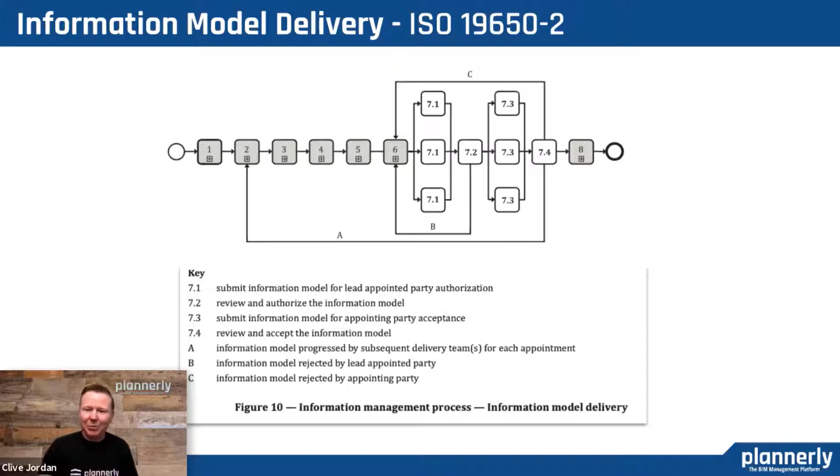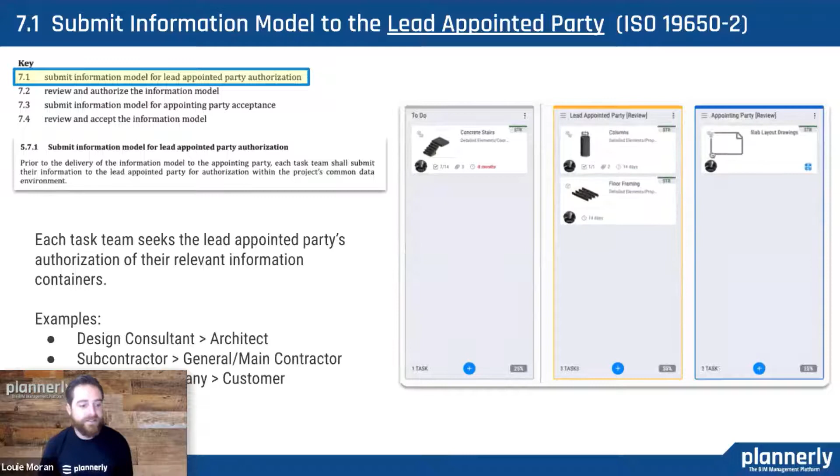In very simple terms, we're looking at submitting the information to the lead appointed party. And that could be a number of different ways. Design consultants to an architect, subcontractors to a main contractor, an outsourced company to a customer. This could be any one of those as examples.

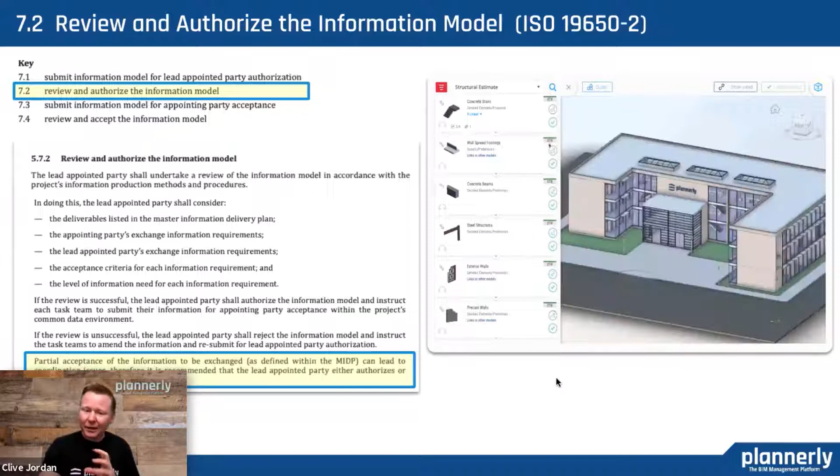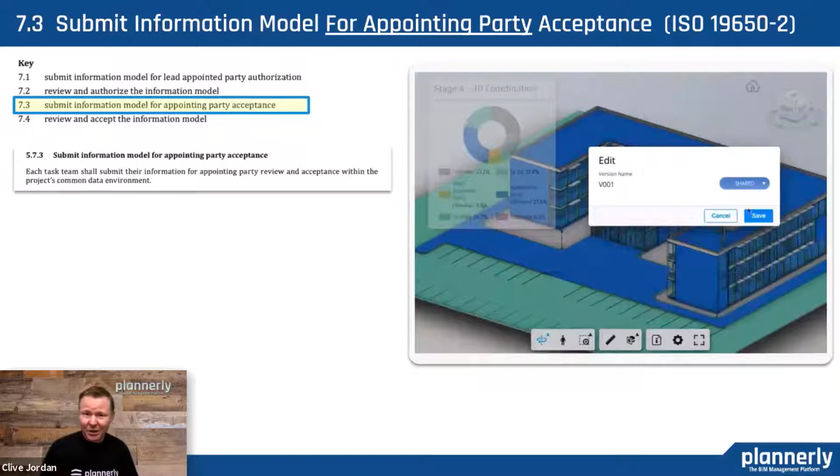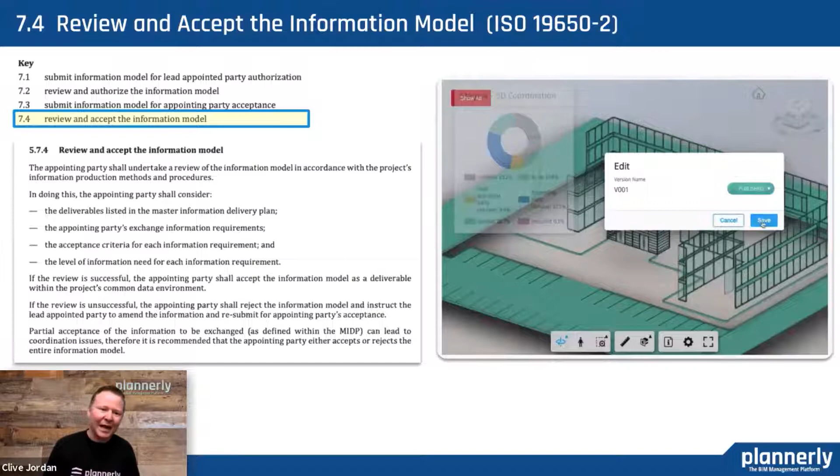And then once approved, if not all rejected, once approved, that would then be submitted to the appointing party for acceptance. And again, once they have gone through all of those really important steps of verifying that it meets the listed deliverables in the master information delivery plan, and does it meet the level of information need, all of the exchange information requirements, etc., then we have some deliverables that can be authorized for use.

So if we break that down, there's a few steps there, and it's not overly detailed. We've got a lot of documentation to read in the standards, which is fantastic, but when we look at this part, it's not in massive detail. In the previous stage where we were producing information, the task team has their review before submitting. As they submit to the lead appointed party, they are accepting or rejecting, and then the appointing party is accepting or rejecting.

This whole workflow is pretty simple when you look at it, but today we're going to unpack a few best practices to dig in deeper into each of these aspects and hopefully provide some ideas that can improve your delivery workflow. We'll look at understanding requirements, how we define the submittal and checking workflows, how to keep good records, and then how to use structured data in other tools as well, not just in the Plannerly workflow.

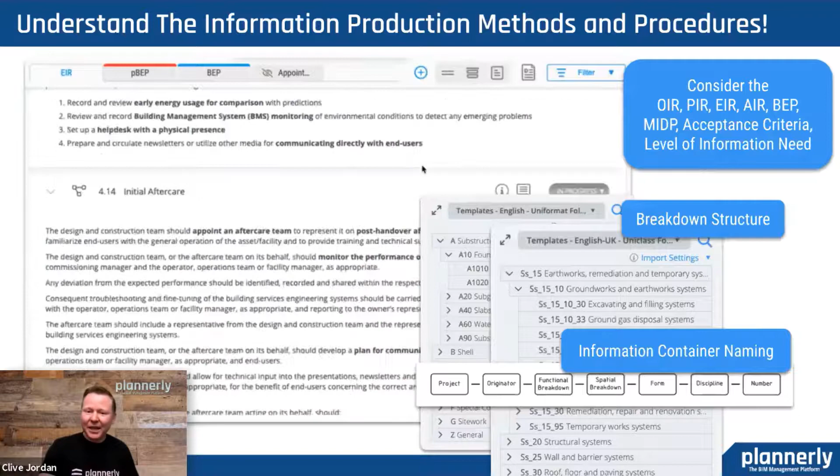So the first one is understanding requirements. We need to read the information production methods and procedures contained throughout that plethora of three-letter acronyms, all of those documents. How am I exchanging? And when we get to level of information need, what am I exchanging? And then when I exchange it, how do I name that container, that set of information? How is it classified? Just understand the standards, basically.

Yep, and then your scope, purpose. When it comes to ISO 19650, everything is driven by why you're doing it. We always start with the why. We push that in almost every webinar. Start with the why when it comes to any scopes. We've mentioned these in previous episodes, but having the why is going to have you package these in the right manner.

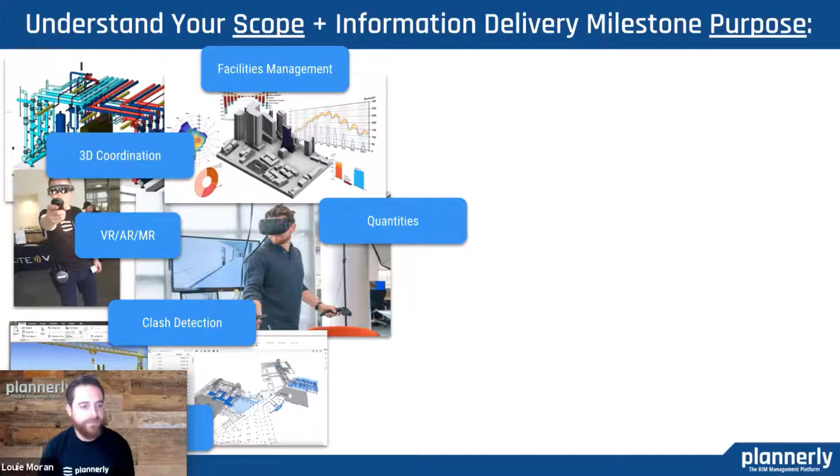So for facilities, quantities, AR, VR, clash detection, these are the delivery milestones that you'll be sharing and delivering to the next team. And when you package it, visually understanding it in a structured way is really important, as we'll show downstream in use of that information in other tools as well.

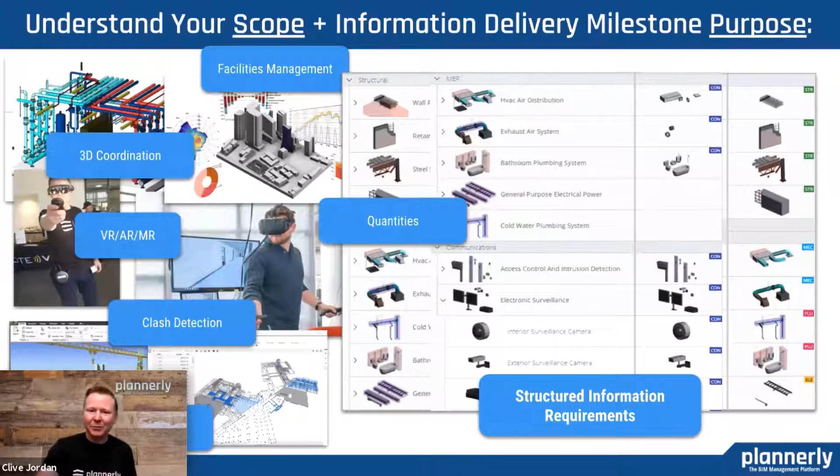Management tasks, it's not just about understanding from a BIM perspective, from a modeling perspective, but also information. Here we have a set of tasks related to, in this example, the assessment of need. But in this phase of the delivery, you'll actually have a set of tasks which are checklist-based items that are part of the information management tasks, also part of the templates inside of Plannerly to be able to check off.

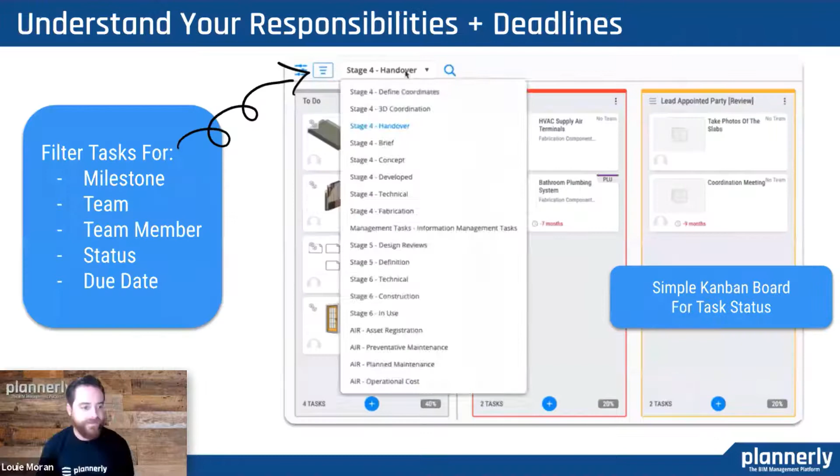We need to understand what is our responsibility. We typically have documents that summarize all the responsibilities of different teams, but we need to understand, maybe have a tool, a way of filtering for what is responsible, so you have a solid checklist of items that you'll be wanting to submit for.

And the Kanban board shown in the previous slide was really about understanding the steps, defining this early so that teams can clearly understand what the statuses are and communication methods. In a few examples here, we have from 'to do' to then 'ball in court,' for example, the lead appointed party and the appointing party, who is reviewing at that point.

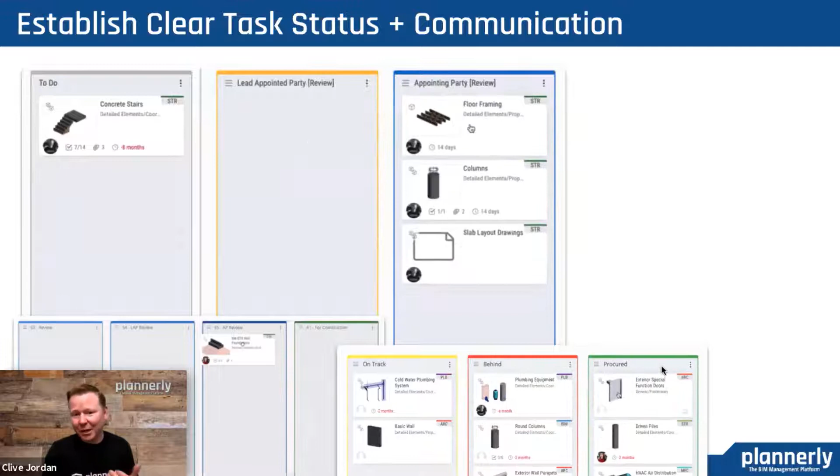So in the bottom left, we've got statuses following the UK annex. So we've got things like S4 that are understanding the status of a package of work, or we have things like on track, behind, and procured, for example. These are completely flexible, but the important part is the teams know what those are going to be, and they are notified when certain things change.

In the example here, I'm moving a couple of tasks from the lead appointed party to the appointing party review, and they will be notified by email and in the project feed. So this is really important to clearly communicate how that's going to occur. It's important to define each step and what it means to accept and or decline a task.

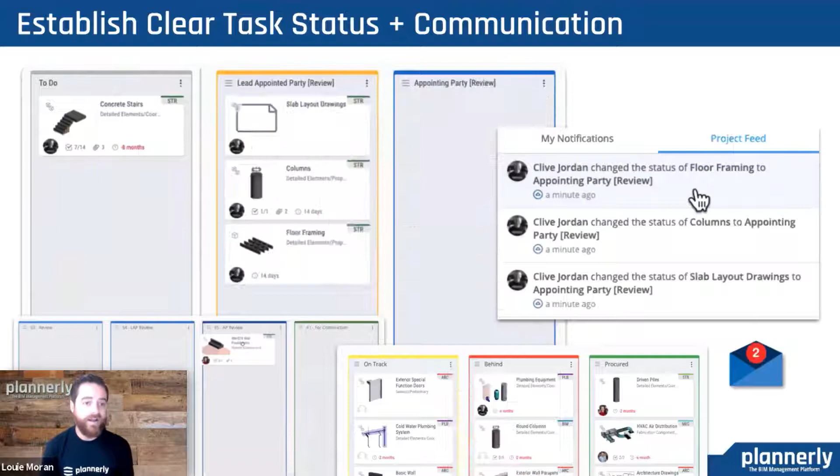So once we understand what we have to do, how will we submit that work? What's a submittal workflow that we can understand a bit more clearly? The first one is version control of those deliverables. So once you've got this container of information, it's named appropriately.

How are you managing the versions and sharing those versions of all those different files and formats, and potentially dropping them into Plannerly, managing version control, or connecting up to another CDE that might use the Autodesk Construction Cloud to be able to manage that and always know that it's in one place, but connect it into your deliverables, for example, inside of Plannerly.

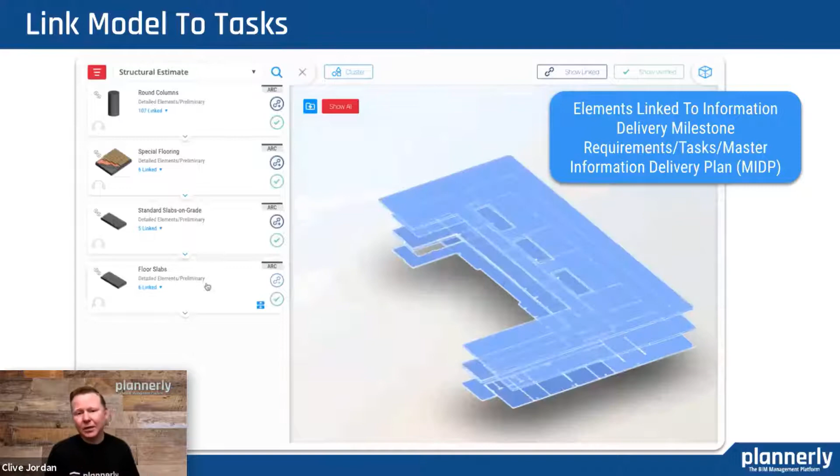And then once you've got that model, we want to be able to understand what we're delivering to. So there's a request of the information requirements that's then linked to the information deliverables. And those links are really powerful when you're reviewing the items. As we go through and start to update the status, these stairs are now ready for the appointing party. I am the appointed party, and I am the one that is either sharing or moving.

We saw in the drag and drop, you can drag and drop a card, or we can just change the status of this card that is connected to these elements to update the people that would then need to start checking their work. And as we update the status, it's pretty cool to be able to visualize that.

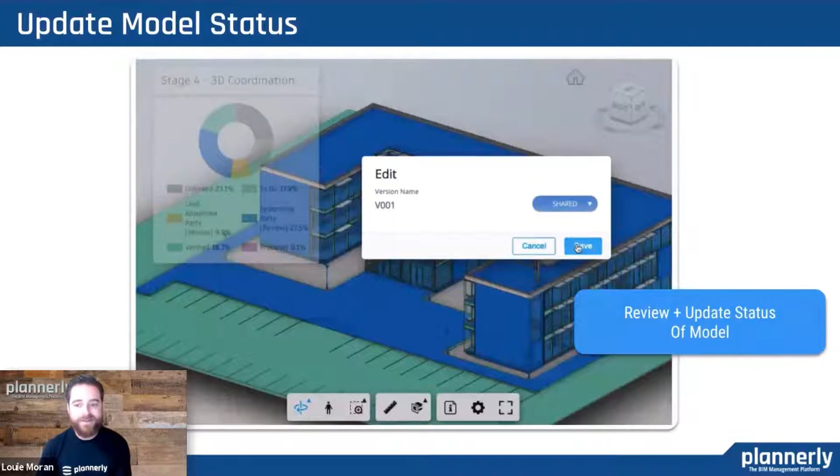It's important to understand what the status is of each task, whether we're the ones submitting or receiving the data. We don't want to waste time reviewing items that are not ready to be reviewed. So continuously updating the task status is important. It just makes everyone more efficient. No wasting time trying to figure out what is ready for review or what is still in progress.

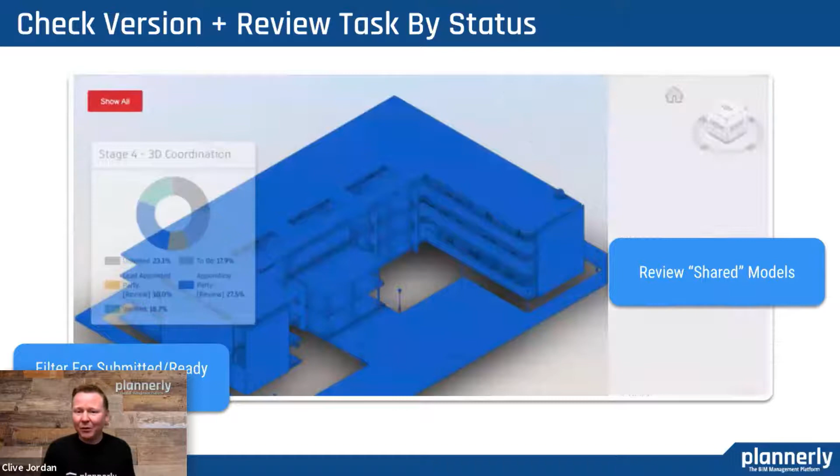And once we have delivered a model and connected it up with the requirements, how do we then go through a validation workflow? One thing here is to go by status, and we're looking on the model on the right-hand side to make sure that we've got the right version, first of all. So this is more of putting a manager's hat on, putting the lead appointed party's hat on, and saying, I've now got to review these tasks, and I know that they've been submitted to me.

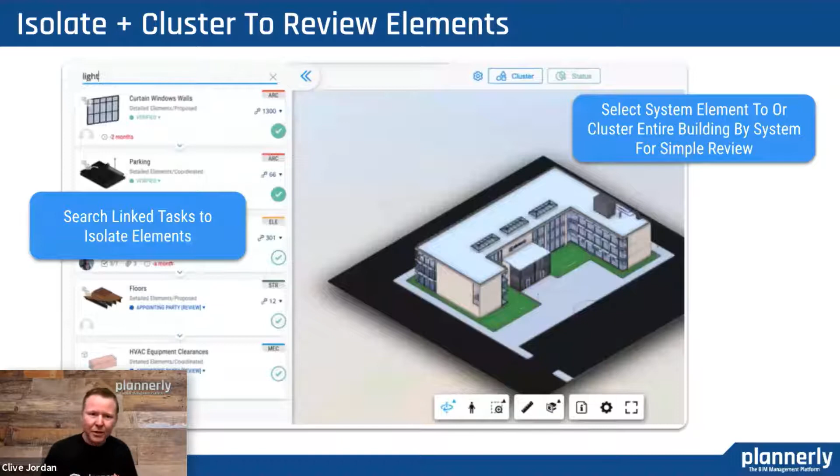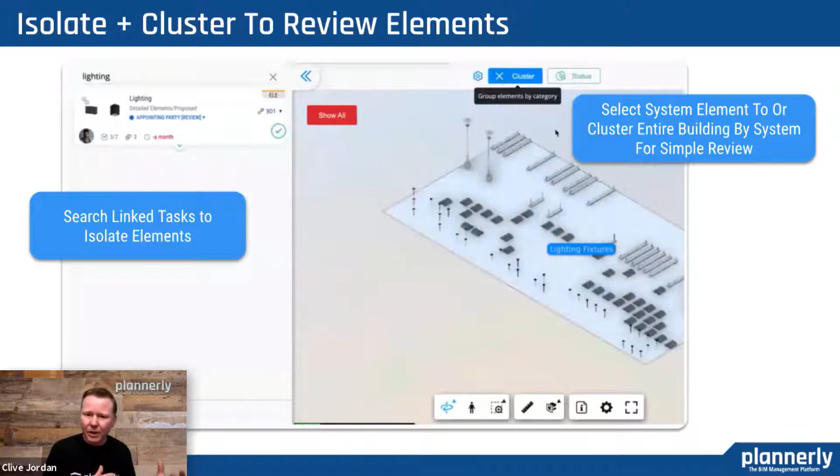I can go through by clicking again, visualizing, and seeing what is ready for me to take a look at. I can also maybe search for something that I would like to review. In this example, we have a lighting task, and the example here is showing being able to cluster. So if you've got a lot of elements dispersed in a building, it's difficult sometimes to review them. So maybe it's useful to take them out of the building, group them together, and review them together.

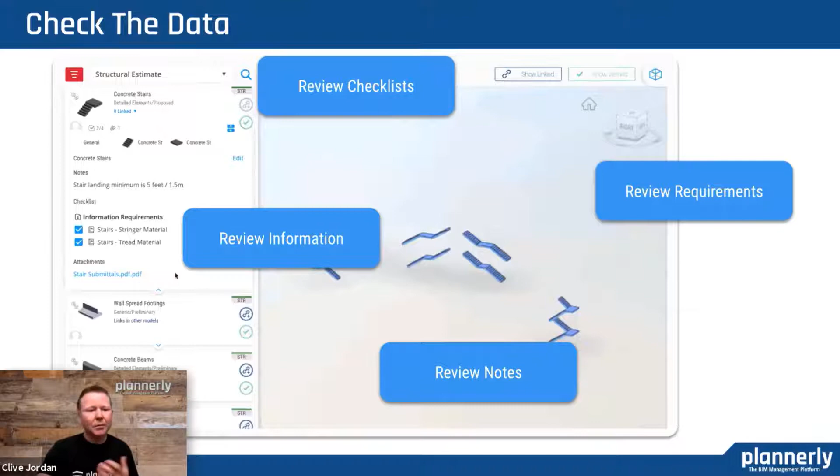Another way is being able to understand the data requirements. So each task might have certain information requirements or checklists, notes, attachments that have to be complied with, maybe submittals that are required to be followed. That's preparing some of the tasks ready to review them, but it's important to communicate fixes. So communicate whether you have a question on a task, or communicate what is missing.

We tend to do that in different platforms. Within Plannerly, you can do that specifically on that task item. Mention who was appointed, or if there's somebody responsible for that specific task, mention one of the team members. So gathering and containing all of that communication in one area just creates efficiency throughout the workflow.

Yeah, and that was a really important point, connected to the original requirement. If you just reject a task without saying why, or without having that trail of what has been requested, what has been submitted, who has actually moved the status from one status to another, it's really difficult for people to know what's actually needing to be fixed. So that's a really important part of the communication. And if it's tied all the way back to the contractor requirement, it makes it easier for you to know what's missing, what needs to be added.

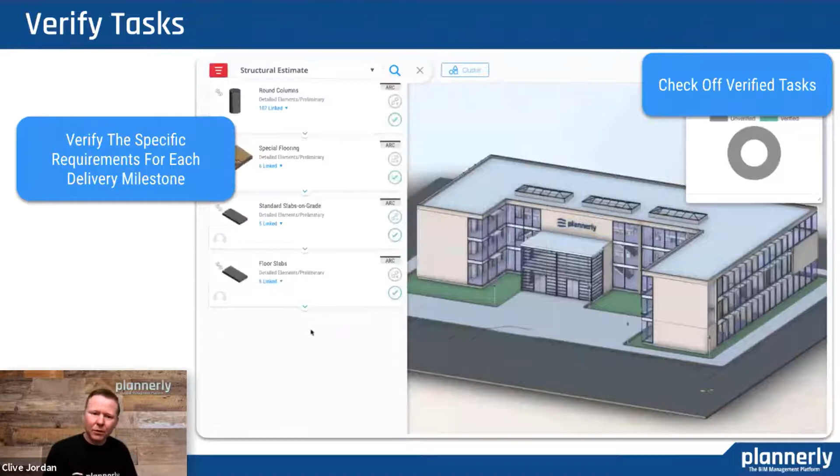And then as we're going through, being able to filter for the tasks that are ready, and then visually seeing the color coding as you're verifying. We're checking off tasks and things are turning green. It makes it a lot more powerful to see.

And as we are sharing a model to be able to be reviewed, the next step is to publish the model, and making sure we've gone through all those workflow steps before we publish it, so that we always have good quality models that are published and authorized for use. So there's these steps: work in progress, shared and published.

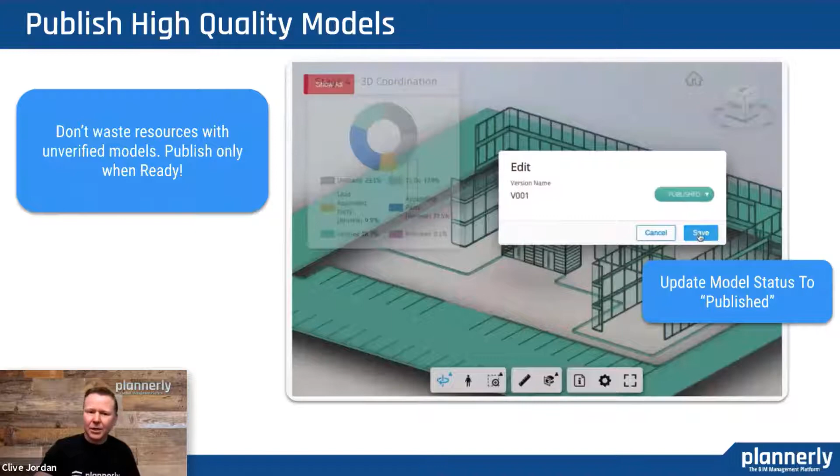We only get to that published status when we are authorized for the use of the model, and it's gone through those steps that we've just looked at for the review process. One of the really important steps that we touched on there was keeping records. And nobody likes to keep records. Nobody likes to be manually finding, this is what I did, and documenting it in maybe meeting minutes or a register of events. So we kind of make that super easy as well.

It's all an activity history that is on the card, as we mentioned, that is taken from the request through to the delivery, through to the approval. And we can see every time that something changes related to this, or somebody comments or mentions somebody else, so that we understand who performed the tests, when did it get checked, what the results were, did it pass, did it fail, and really clearly defining that.

And boom, okay. That's the process there, right? Yeah, there's a lot more to it. We know that there's not just a few steps within Plannerly. There's lots more tools available for us. So we know that there are many that we can use. There are different types of deliverables, as we mentioned, right? 3D coordination, estimates. So each one requires different tools for verification.

We kind of showed some basic ones to just track the progress through and verify the task. But in between, you might have some other tools or processes for verification. And some of the workflows we're about to share have been shared by our customers, and using structured data. Yeah, absolutely. And that's the importance, is structured data.

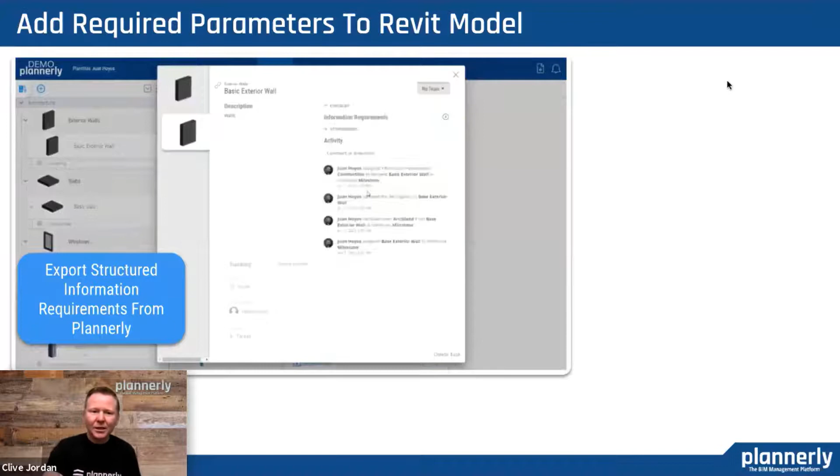The first one, Juan shared with us. It's a really great example. I saw him on there. Hey. Okay, cool. Thank you so much. And actually, your details are here. So if anyone wants to connect, please do.

This is the script that takes that file from Plannerly and then starts to add the requirements inside of the parameters required and added to the elements inside of the Revit file as well. Yeah. So we've got each element loaded. It starts with no parameters. We load the file. It loads them into the project and then also applies them to the elements that are requiring them as well.

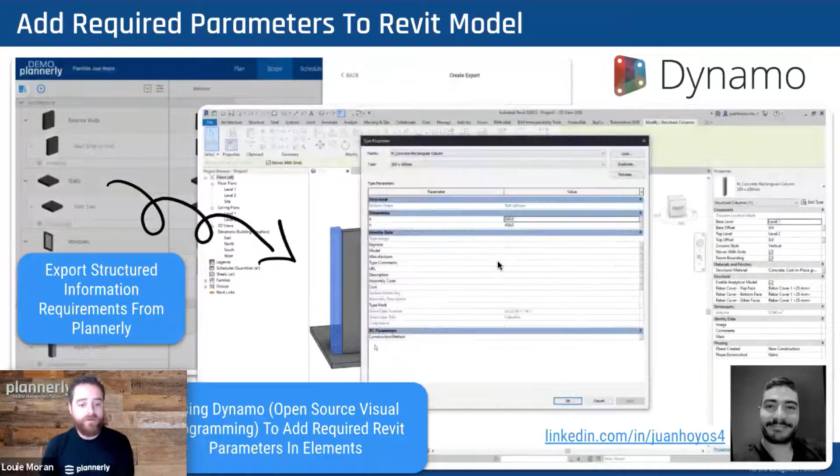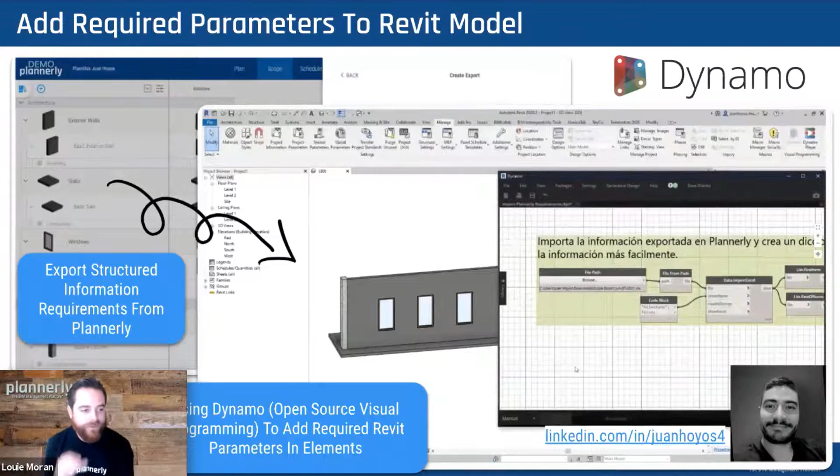Yeah, this is just an example of a specific workflow from the task team to the lead appointed party. So this is doing that work before. So it's important to understand these examples could be applied in between the verification or the workflow there. Yep, and more fun things from us here as well. Look out in this space.

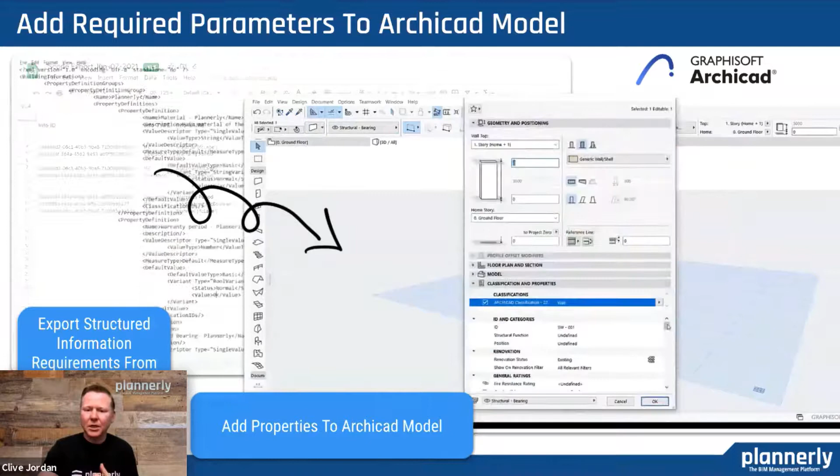So that's for Revit, also for Archicad. Archicad is the same principle, being able to use that data, apply it into the project, and use it for the properties, I should say, on each of the elements. So we see those properties here displayed as Plannerly properties that are now available inside of the elements inside of Archicad.

So from a couple of huge behemoths in this space, SimpleBIM, if you haven't heard of them, a great tool. Again, being able to use those requirements and this time checking those requirements. So there's a simple format of an Excel that is used then to check those properties and parameters to make sure that they are added.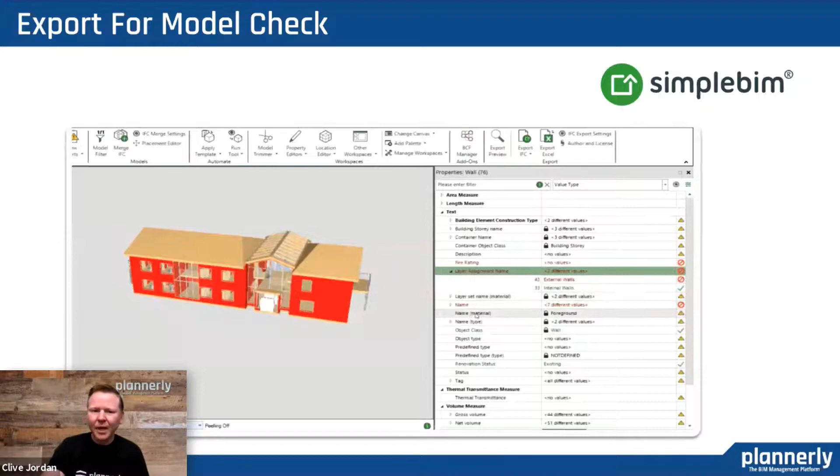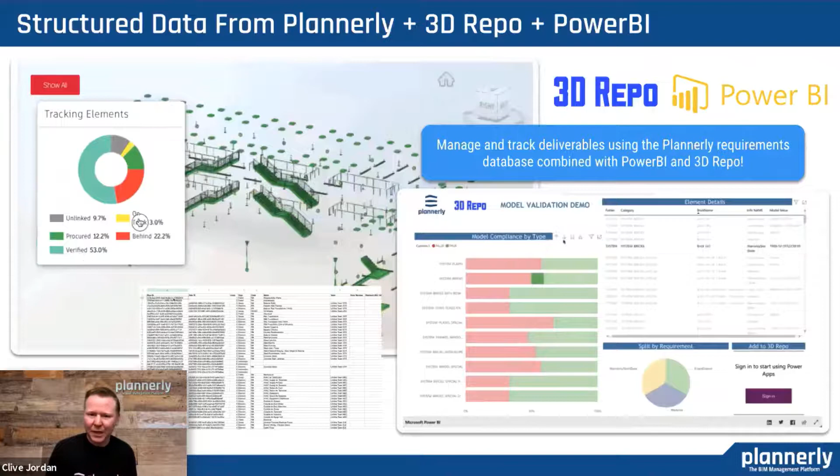And then the last of those examples we've got is being able to use, in this example, Plannerly, 3D Repo, and Power BI to combine data and do validation on the data. So in this example, it was an export from Plannerly, an export from 3D Repo, and meeting in the middle using Power BI to dashboard, drill down, and understand whether those requirements were met or not.

As you're following the information delivery workflow for ISO 19650, it's not just about throwing a model or information deliverable over a fence. First, we must understand the requirements, and they are usually in lots of different places.

In Plannerly, we gather all of those together, whether it's the PIR, EIR, AIR, BEP, all of your requirements based on level of information need, understanding those in one place. It's important to define a submittal workflow. This makes it easier to review. It's also gathering all the information in a consistent way between multiple models, multiple teams. So it's important to have a defined submittal workflow so that it just creates that consistency for reviewing.

And when you have submitted your work, you need to check it, or the principle is you need to check your work before you submit it or as you submit it. And inside of Plannerly, we allow you to connect it to the information requirements. So as you are delivering, before you submit it, before you say this is now ready, you are checking against the original requirements. Same principle here of having a defined checking workflow: it's easier to collaborate with the QA process as well. Because if I'm following the same list or the same process as Clive, it's something we can do collaboratively instead of me just trying to figure it out and Clive doing his own thing. We wouldn't be able to compare progress or status updates.